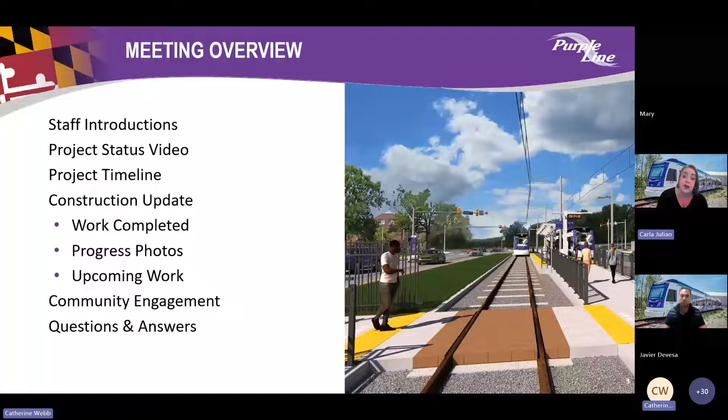Next slide. Tonight you're going to hear from Ray Biggs II, our Senior Project Director with MTA. You're going to hear from Doran Balso, our CEO of Purple Line Transit Partners. Also, Hugo Fontieres, our Project Executive with Maryland Transit Solutions, and Javier Devesa, our Construction Manager for this area. I will be facilitating the meeting tonight, and if you don't know me, my name is Carla Julian, and I'm our Stakeholder Manager.

Tonight what we are going to focus on are the stations including Adelphi Road, UMGC, UMD, Campus Drive, UMD, Baltimore Avenue, UMD, College Park, UMD, and Riverdale Park North, UMD.

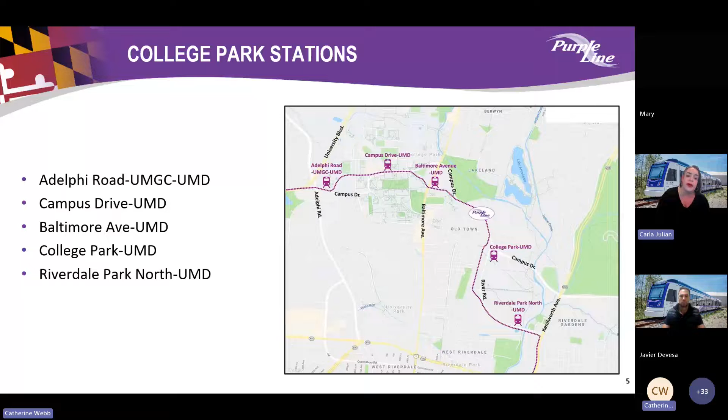As we are progressing construction throughout the project, there's a lot of different phases that are ongoing simultaneously to advance our work. We have utility relocations going on, storm drain system installation, track installation, system utilities, and testing. All of this needs to occur at the same time for us to progress within our 16-mile alignment.

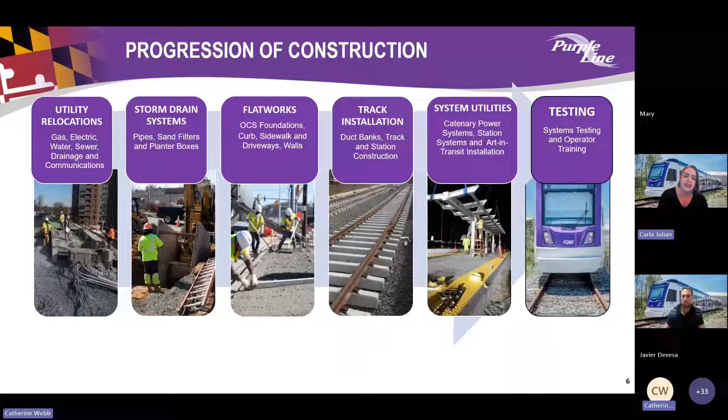You may have noticed some exciting stages, you're starting to see the station canopies go up in our track installation. To show you that progress on our next slide, we're going to show you our spring 2024 progress video that features our project leadership team. Next slide, please.

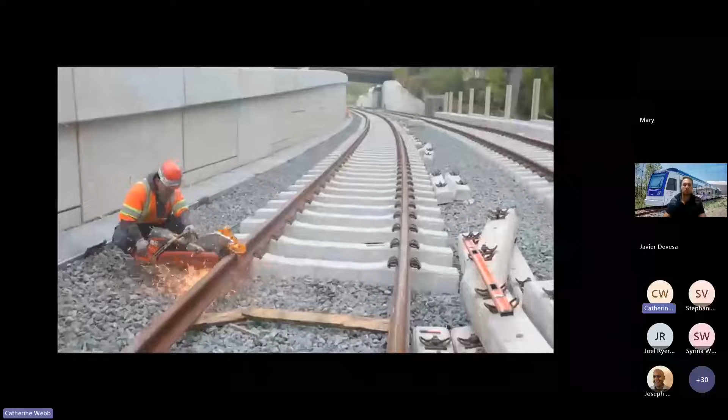Welcome to the latest update on the Purple Line project. This year, we've placed thousands of feet of track, an exciting example of tremendous progress being made by Purple Line crews. 2024 is set to be a year of momentum.

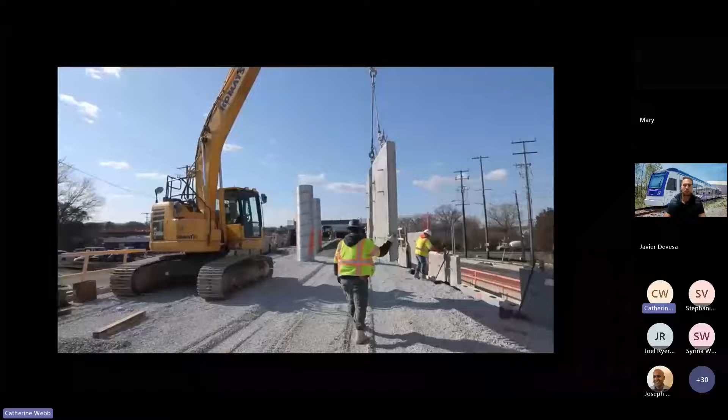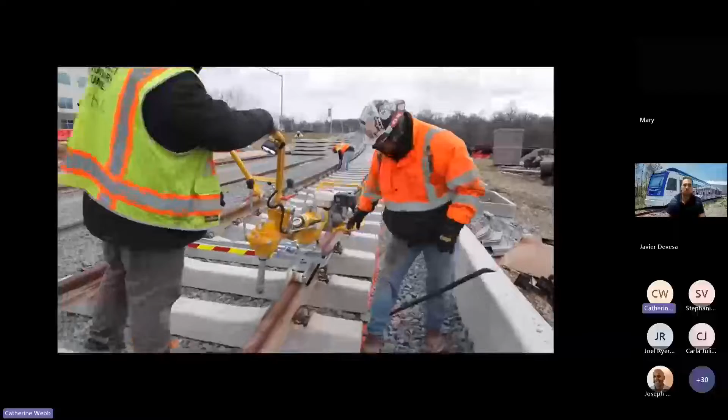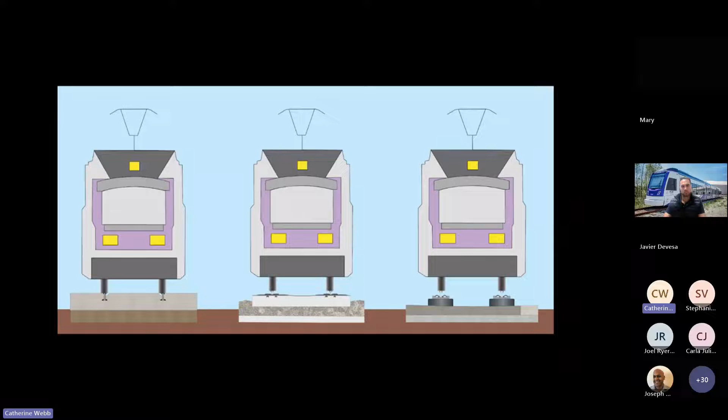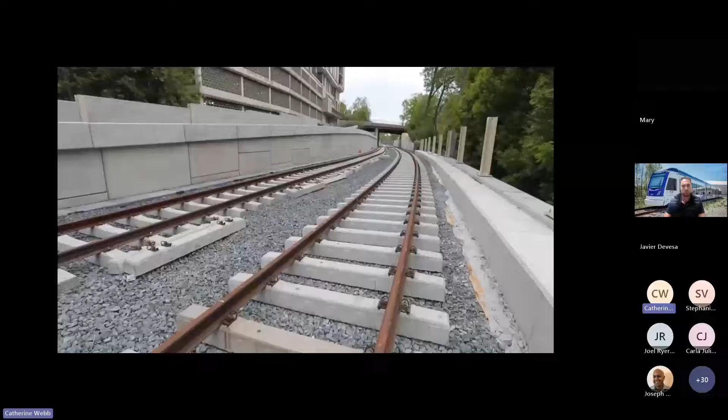The Purple Line track installation teams will be reaching even more areas. Already, tracks have been placed at the southern end of the project, along Ellin Road and Veterans Parkway, and throughout the University of Maryland. The track at Campus Drive is embedded track, seamlessly integrated into the road surface. The Purple Line boasts 3 main types of tracks: embedded, ballast track, and direct fixation. Each plays a crucial role in our mission to ensure a smooth journey from New Carrollton to Bethesda.

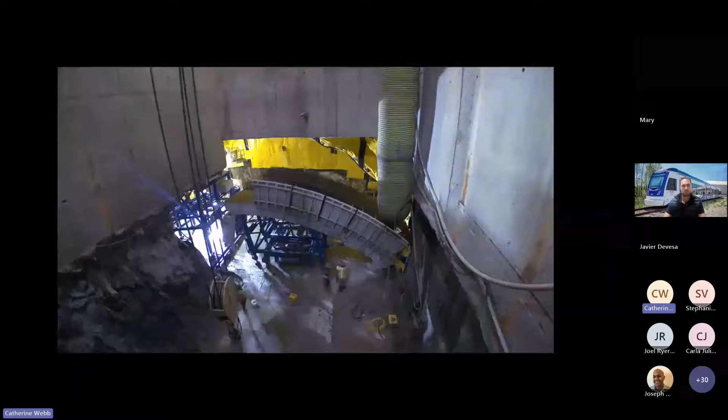Progress is visible along the whole 16-mile alignment. In Bethesda, crews have put the custom-made sprung arch form system to work to cast the first sections of the new cavern ceiling. The cavern will connect the 130-foot deep shaft to Metro's Bethesda station.

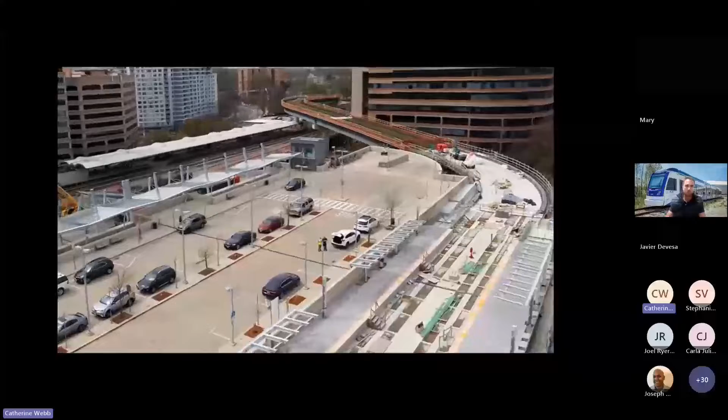In Silver Spring, the new Purple Line station is rapidly taking shape. From the installation of utilities to the erection of canopies, progress is evident at every turn. But Silver Spring is just one of the 14 stations underway.

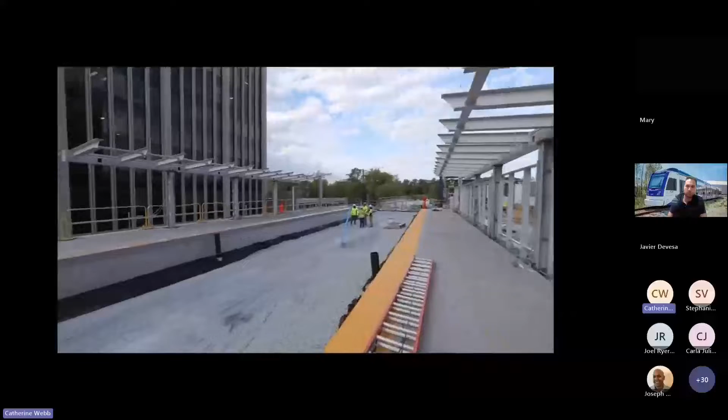Station platforms are also emerging at key locations like Connecticut Avenue, Lyttonsville, Campus Drive at the University of Maryland, College Park, and Glenridge, among others.

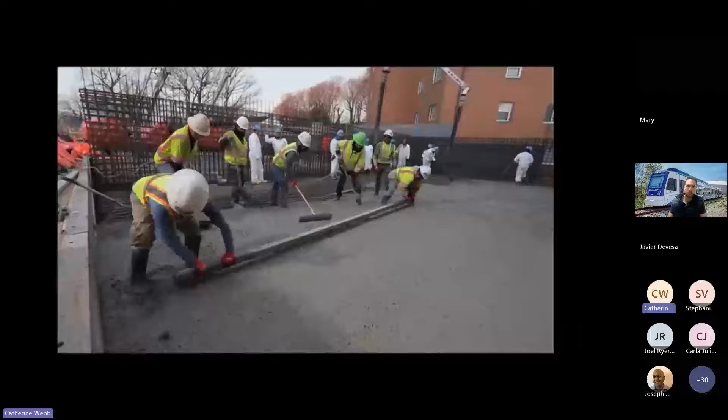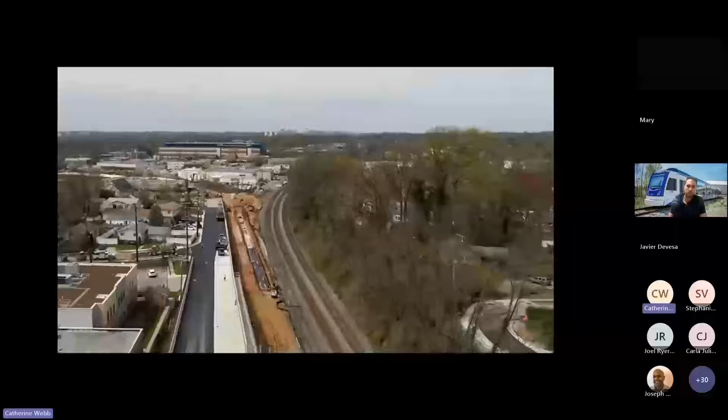In December, crews poured an impressive 720 cubic yards of concrete in one day to form the roof of the tunnel extension between Wayne Avenue and the Manchester Place station. We also finished the concrete, fencing, and paving needed to open the new and improved Talbot Avenue Bridge, which is part of the Capital Crescent Trail and an important connection for the communities of Woodside and Lyttonsville.

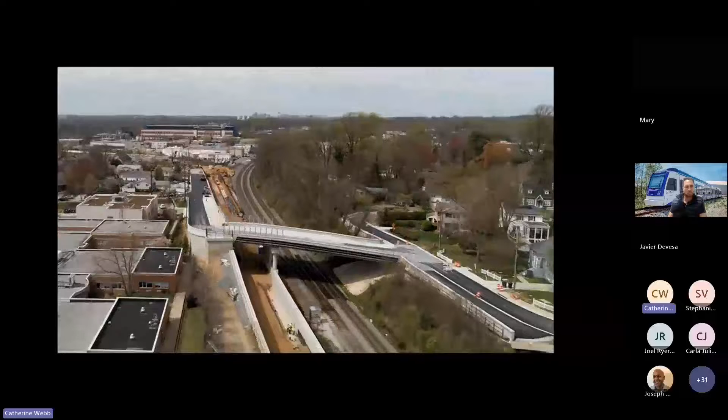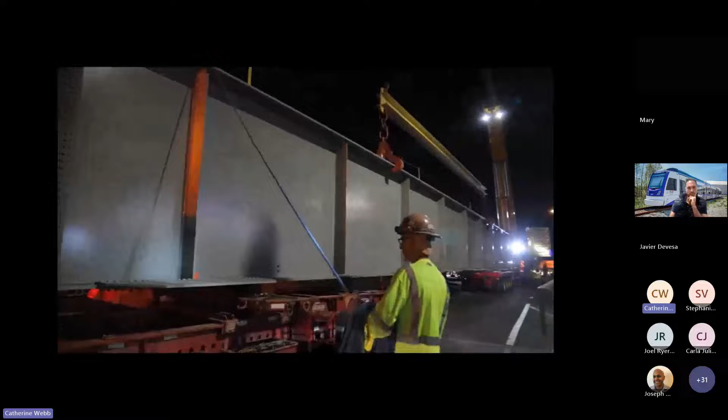In Prince George's County, the Kenilworth East-West Highway Flyover Bridge, which is made up of over 617 tons of steel, has been installed over this very busy intersection.

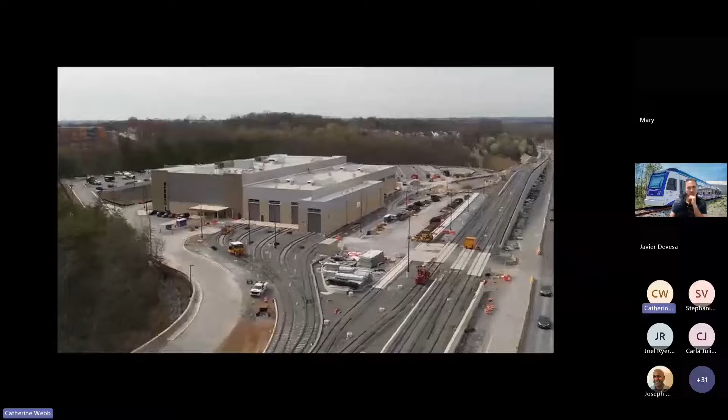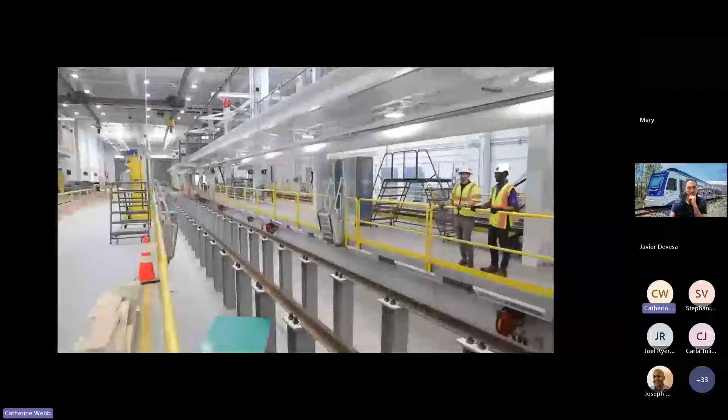In Glenridge, the Operations and Maintenance Facility prepares to be the heart of our operations. Here you'll find a variety of specialty track segments, essential for guiding our light rail vehicles as they navigate through the facility. Inside the OMF, state-of-the-art cranes and meticulously designed workspaces stand ready to handle everything from routine maintenance to major repairs. While we celebrate these achievements, there is still much work ahead.

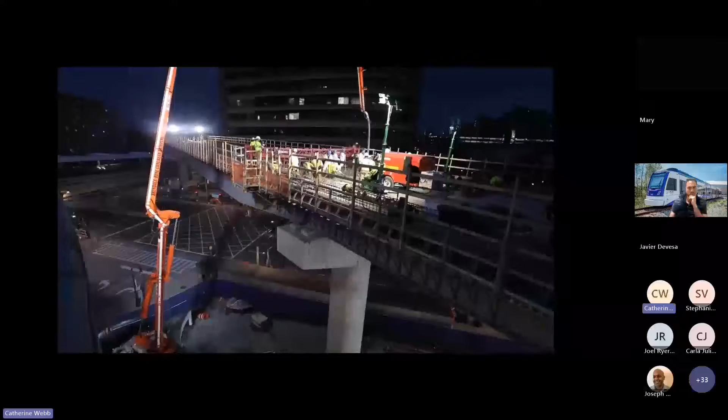As you can see, we have more visible tracks, stations taking shape, and complete bridges as a few of the Purple Line's most exciting milestones this year.

This time next year, you can expect to see the Purple Line light rail vehicles begin testing on the new test track located in Prince George's County.

Before starting through all the sections for the segment, I just want to explain a common question that we received so far by the public. We've been talking a lot about duct bank installation around the project, and a lot of times we get asked what is typically a duct bank.

A duct bank is a type of infrastructure that we use for several purposes. The main one is to feed the train and properly make all the proper connections around the track works and the different systems. Basically, it's the infrastructure where we allocate the conduits, and inside we allocate the cables that make possible all this connection. They are vital for the infrastructure.

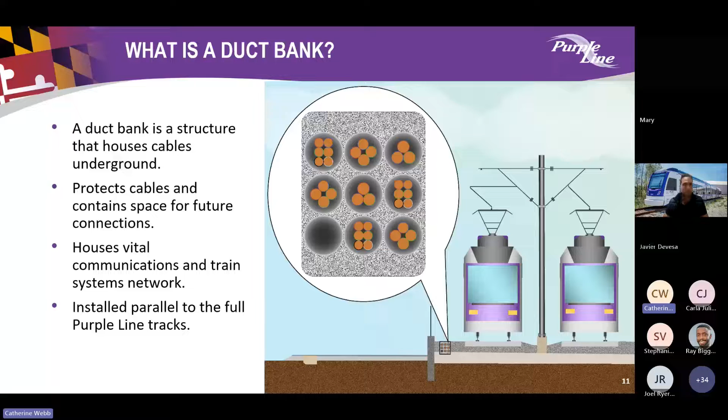So let me get started from west to east, starting at University Boulevard and Adelphi Road. That's the start of segment 6.

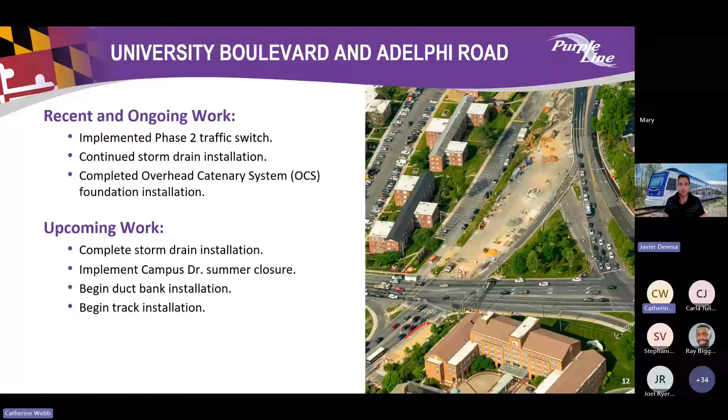We recently made a big traffic shift in this area where we put everything into phase 2. We have started doing the demolition works in the area, where you can see some of the construction work in this picture. Next works are going to be related to duct bank installation and future track works west of Adelphi.

East of Adelphi, we're going to start what we call the first summer shutdown in this Adelphi to Presidential Drive section. Our main intention is to complete tracks 1 and 2 between Presidential Drive and the curve of Adelphi Road, leading to the station, and start the station works this summer.

One important thing is that we're going to allow access at all times to the UMGC buildings for vehicles, and we intend to complete all the infrastructure below the tracks for this section and start working on the next works on Presidential Drive.

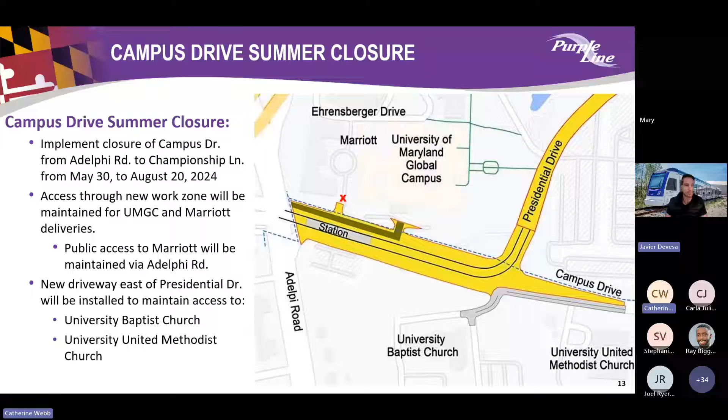We are going to start most of the OCS, although we already completed some of it for phase 1 during the summer shutdown we mentioned before. We are going to complete all the OCS between Adelphi and Presidential, and the next activity will be the duct bank installation that we need to complete under the tracks.

One important thing to note is that we're going to start the TPSS, the traction power substation Q5, which is placed next to one of the planter boxes on the south side, and we're going to start all the works related to that. There's a lot of duct banks involved and some other items.

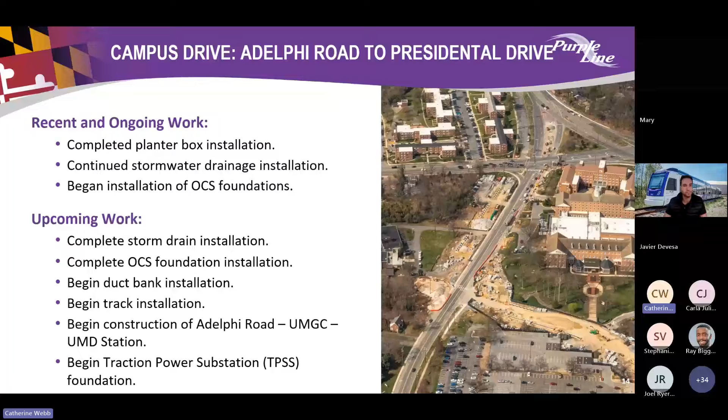We enter into the core of the university. That's probably one of the areas where we can see what the final product is going to look like.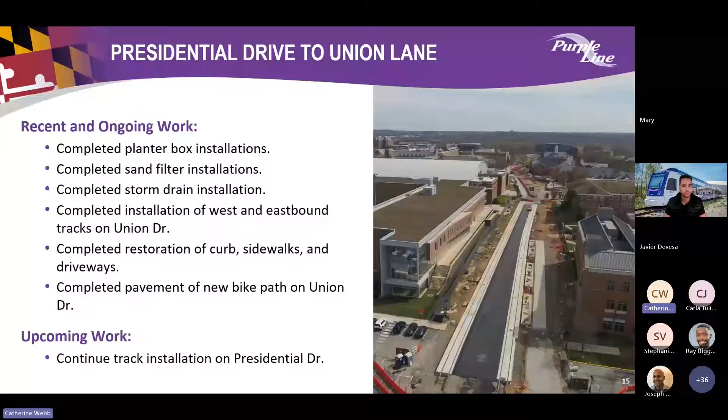Right before Union Lane, we have the station, Campus Center Station, which is going to be placed in the middle of the UMD. We already completed the north platform station in the last summer shutdown, and we're currently working on the south one, on the conduits, walls, and the rest of the platform. Our intention is to complete both the north and south platforms by the end of this summer.

To do that, we're going to require a lot of conduit installation below. At the same time, west of Union Lane, right between the two platforms, we already have track 2, which was completed last winter. This summer shutdown we're going to do track 1, on the south side. So basically from Union Lane to Alumni Drive, what you saw in the previous picture, we're going to have both tracks 1 and 2 completed.

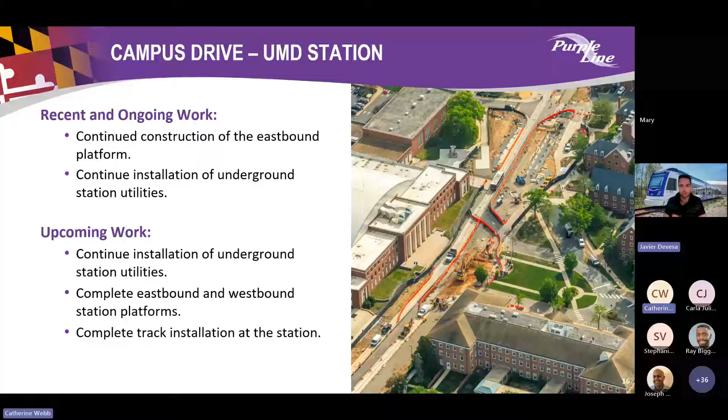Following to the east, we made all the underground utility works between M Circle and Union Lane. In the picture you can see that everything is ready to start the track works on the south side. We just started the track works with our sub from M Circle to Union Lane. It's going to be an ongoing work. We started at night and we're going to shift to days as well, trying to keep a lot of crews booked for this section. Our intention is to complete all of track 1 in the south during this summer.

This Thursday we're going to start the summer shutdown in this section, where we'll be able to start working on the south sidewalk, first placing some of the conduits related to lighting foundations, and completing all the sidewalk and bike path.

We need to divide the work into different sections related to every building, and we are structuring all the works to allow pedestrians to walk on the north side during the summer, opening crosswalks between this area - one at M Circle, another close to the plaza, another close to the HP bus loop, and a final one at Union Lane. So there's going to be a lot of activity. This is probably one of the major focuses we're going to have in the next months during the summer shutdown, and our intention is to have it ready by the end of it.

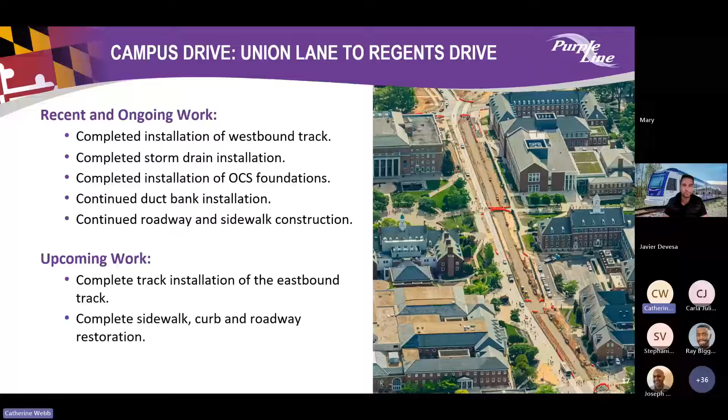East of Regents - that's probably, in my opinion, the area that changed the most in these last months. There were a lot of planter boxes to be installed, as you can see in this picture. These are large storm drain structures that needed to be carefully installed one by one, cell by cell. There's been a lot of work during the winter months, which involved not very good weather, so it's always difficult to install them under these conditions. But luckily, we were able to complete them all, as you can see in this picture.

We also prepared all the base and conduits before handing this area over to the track works. From M Circle to the small vehicle path close to the Turner building, that area has already been given to our subcontractor for track works, which they'll initiate in the upcoming days. This is going to be another main focus for the summer shutdown I was explaining before - you're going to see a lot of track work activities west and east of M Circle. This is going to be part of the package we're preparing for this summer, so a lot of activity in this area.

After summer, we're also going to be working on the flat works east of M Circle. We've already initiated some of the final and permanent configuration for the flat works. As you could see in Regents, for example, we were able to open the sidewalk close to the Symons building and another one close to east of Regents. So we're going to try to advance and expedite as much as we can, but most of the flat works are going to be done after the summer.

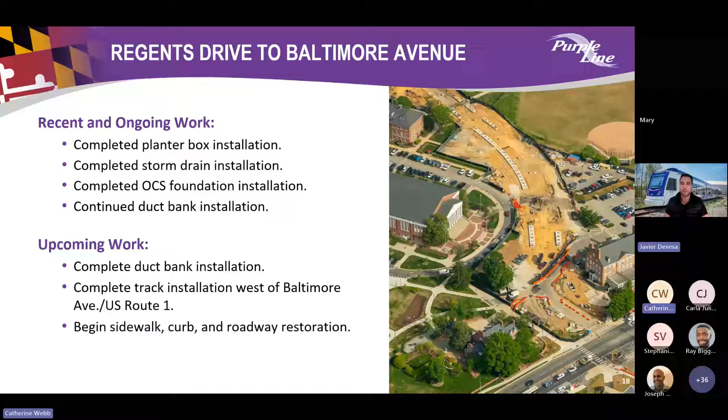Moving east of Baltimore Avenue, here in this picture you can see both track 1 and 2 that were completed east of Diamondback, between Diamondback and Campus Drive. We have completed all the work between these two tracks. Actually, as we speak, we are currently working on the asphalt between them.

We have the intention to switch to phase 2 in this section, which means the tracks you see in the picture are going to open in June to traffic, and we're going to focus construction activity west of this Diamondback area. So in the upcoming months this summer, between Baltimore Avenue and Diamondback, there's going to be the major part of the construction, starting from the very beginning.

So storm drain first, OCS—although we already started some of the OCS in previous months—conduits, earthworks, and so on until we can reach final grade and track works. Also important to mention, in the upcoming months we have the intention to start the East Campus Station, located next to this picture at Baltimore Avenue. That's going to be part of the full package we're going to open for construction in the next weeks.

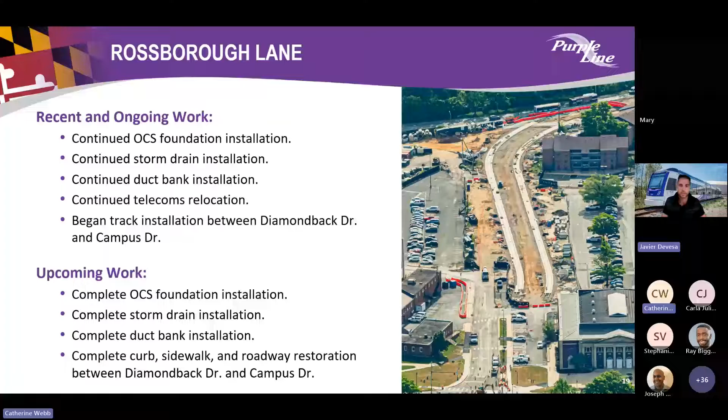Next, works along Campus Drive. We kept most of the work in the core of campus. This area has been worked out with the storm drain and conduits. There's a long path of conduit that was completed in the last weeks, along with some drainage crossings.

There's a lot of crossings in this area, which involve MOT and lane closures. It's not something fast that can be completed, but we've been scheduling them as we move forward and trying to complete as much as we can. Actually, all of phase 1 in terms of the storm drain was completed. We did more than 50% of phase 2, so everything is running pretty good.

After we complete all the previous track works that I mentioned in the core of UMD, we have the intention to expedite the section and start working on the track works as well, so you guys can see the final result for phase 1.

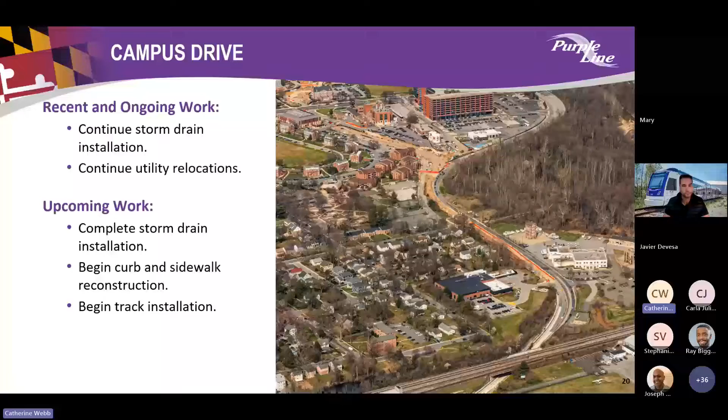Moving into the College Park Metro Station, that is a difficult area to work, to be honest, because of the space. We're limited due to the WMATA area and several buildings as well. So all the work there has to be very carefully studied.

The station has been progressing pretty good. At College Park Station, all the underground works and utility works were completed, and they are currently focused on the platform and on the walls. In the upcoming months you're gonna see the canopies and the final product for the station. So everything is moving pretty good.

North of this station, you can see two walls that were completed around what we call the direct fixation. This is one of the three types of track you could see in the presentation before. We are starting to work on this direct fixation, which in this segment involves just this section around between the walls. So there's going to be both station and direct fixation activities at the same time.

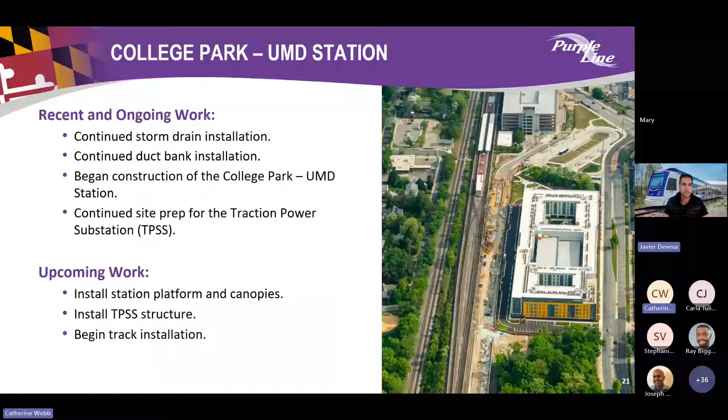At Rivertech Court, there's going to be a closure from June 15th to August 25th for track installation. We are taking advantage of the summer, with fewer vehicles, to do this work. We are going to provide a detour, as you can see in this picture, for vehicles.

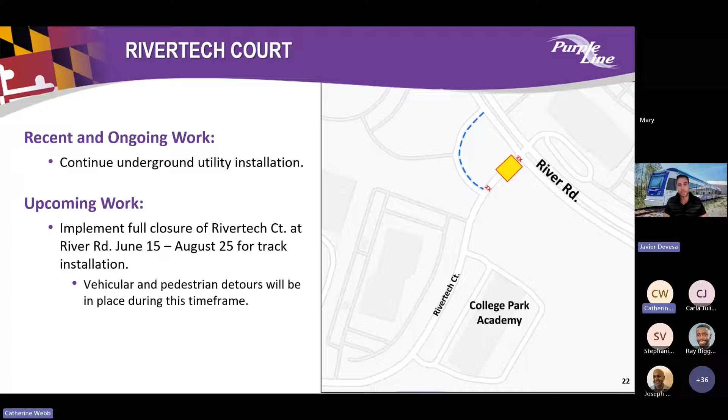That is the vehicle detour that is going to be implemented. Basically, it's going to go all the way through Campus Drive, going to Baltimore Avenue, and trying to get into the final location at Rivertech.

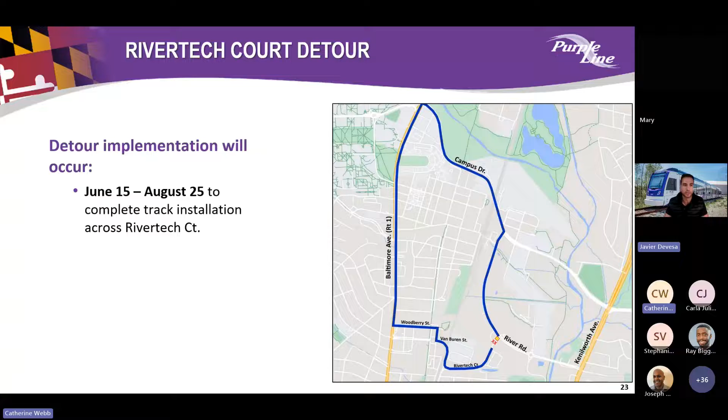For the UMD station at Riverdale Park North, all the platforms were completed, as well as the canopies. This station is actually one of the ones that's been more advanced in terms of visual result. There's going to be different work related to track installation and underground utilities nearby, but you guys can see the final product, or almost the final product, for this station.

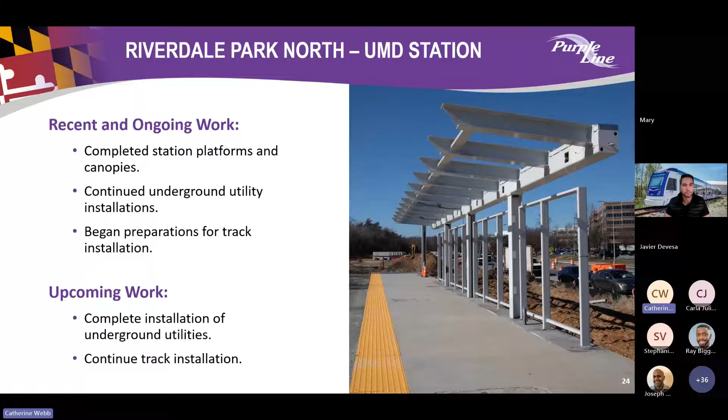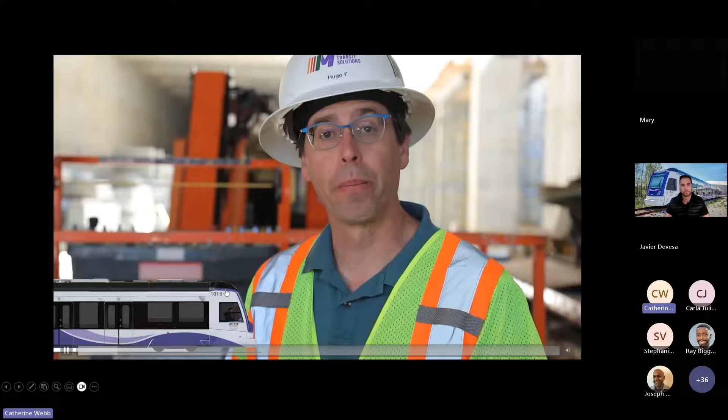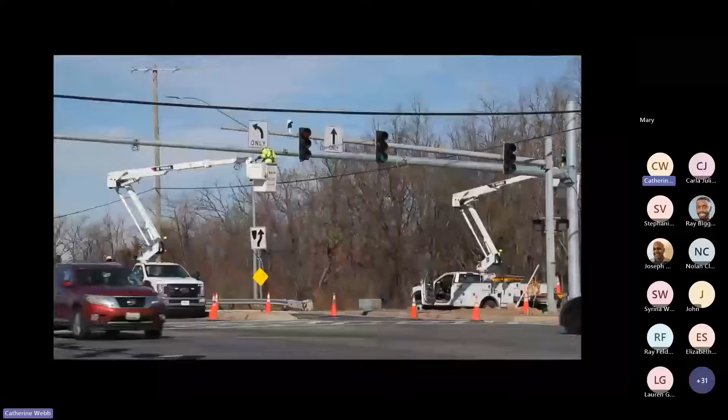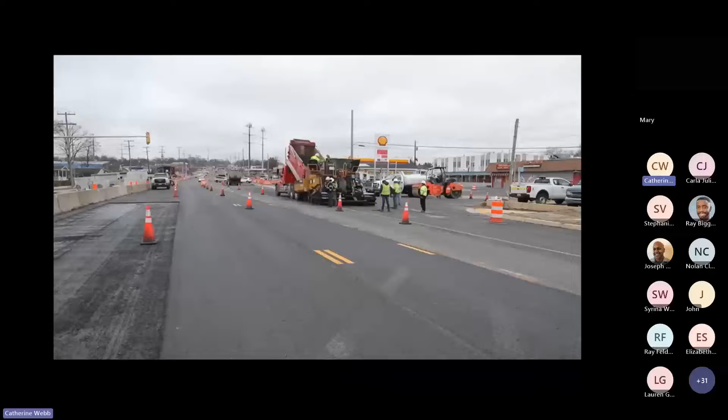Safety is our number one priority, both for our crews building the Purple Line and for the public. As we shift into track installation, you will see more work in the roadways, with crews implementing lane shifts and detours. This could also include pedestrian walkways. So please take your time and follow all the posted signage, and if you see something amiss, please call our hotline.